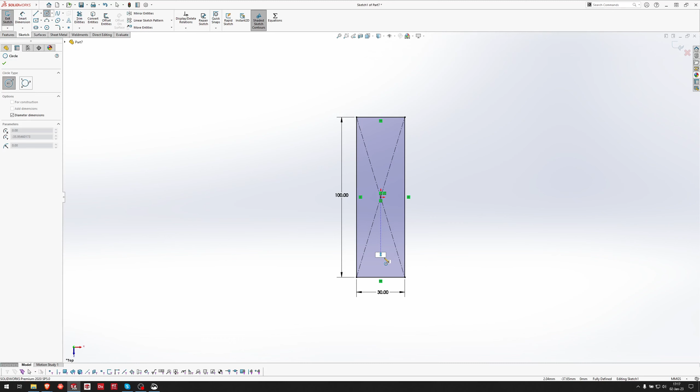We'll go ahead and just do a center rectangle that is 100 by 30. Then we'll add in our circle right away, so this is going to be a 12 millimeter diameter hole that is 16 millimeters. We will make these two vertical to fully define the sketch, then exit out of it.

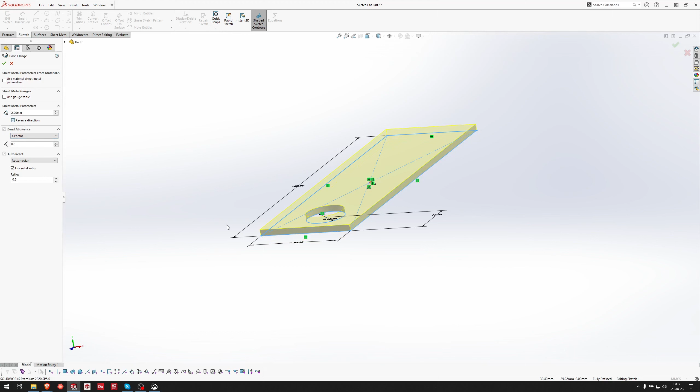From here we set our sheet metal thickness, and in this case I want this to go up, so we'll hit reverse direction, and this is a 2 millimeter thickness, so we're good there. Now one thing we can also do, because we didn't have any bends in this initial sketch, we want to double check our bend radius right here. So we'll edit our sheet metal feature and set our bend radius so we can override default parameters. Everything is there, and we have 2 millimeters and 2 millimeters since our last sheet metal part was just the same.

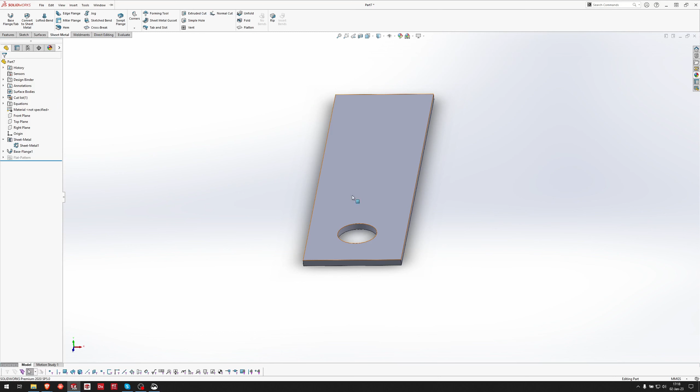So now we'll go ahead and start with our edge flange, which will be here. We'll make sure that the bend starts on that face and then goes out from there rather than being cut in, or the inside face being there. So again, bend outside of that face.

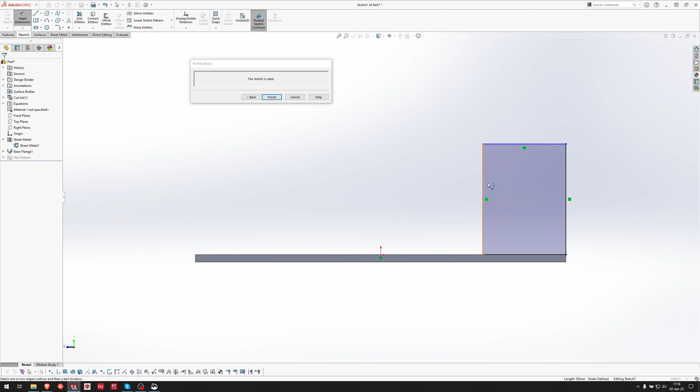And we'll jump into this edit flange profile feature, so I can just drag this line over. Even though it appears fully defined, I can break those relationships really easily. And then I can define this to be 30 millimeters.

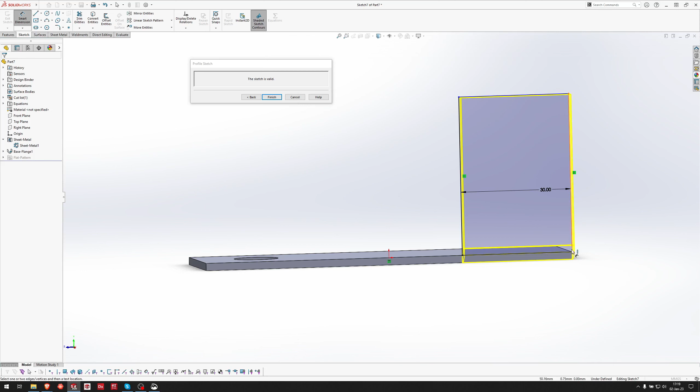Then we also have, and I'm just double checking now, there we go. Okay, so our overall height from the bottom to the top of that edge needs to be 45, and we can delete that relation, and let me just do that to make sure that I'm picking up just the point, not the line. There we go, 45.

And now by deleting that horizontal relationship, I can also add in my 32-degree angle. So just like that, our entire bend is done. We don't have to do separate cut extrudes for everything else, we can just do a single bend.

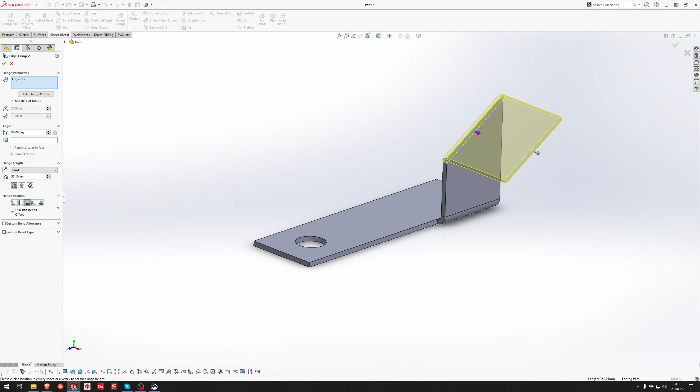And again, another edge flange coming up off of here, outside, because again we're dimensioning to just the start of the bend, so I need to come out. We'll edit the flange profile. We'll smart dimension. You'll see that the origin is placed in kind of a funky spot up here, so it's projected to this edge of this bend.

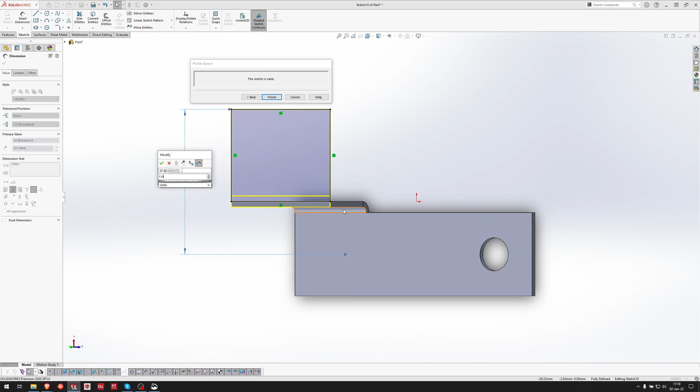So I'm going to dimension to the right plane, so I can actually just click on that in the feature tree and then dimension between those two. This is 110 divided by 2, so that's what I need. And I'll go ahead and add in a slot feature as well.

Perfect, and I'll go ahead and dimension this. This is going to be 12 millimeters wide, 6 millimeters long. I'll go ahead and again pick up, we'll just do this, so 15 is what it's going to end up being. And from the bottom to there is going to be 14.

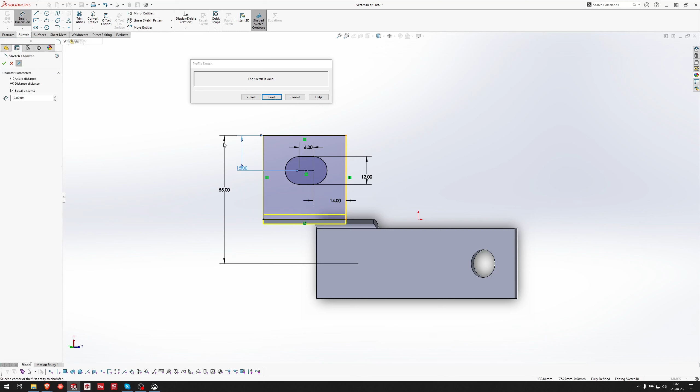Make sure that we picked up the right thing there. 15, that's what we need. And last thing is to go ahead and do a sketch chamfer of 10 millimeters. Go ahead and do there and there. Finish the sketch, and again, just with one sketch, we have our complete profile here.

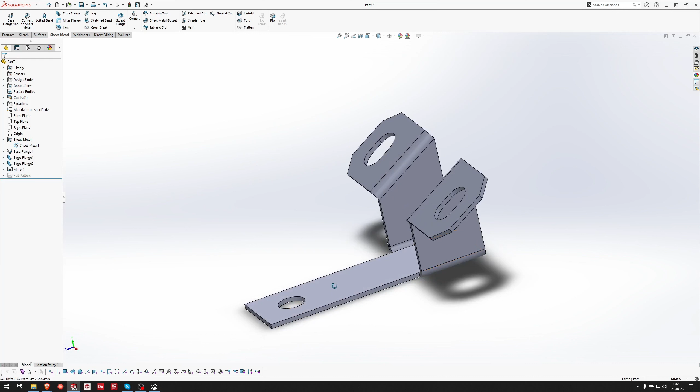We can go ahead and select both of those features and our right plane and jump in and mirror those two features. Hit OK, and we're done with our part. All we have to do now is hit plain carbon steel and verify our mass properties of 114 grams, which is right on the dot.

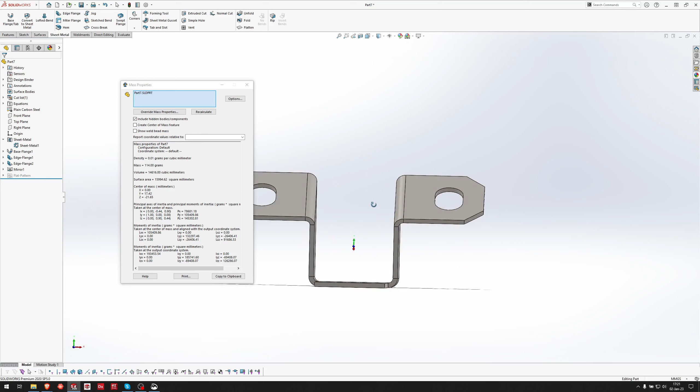So hopefully you learned a few things about sheet metal tools. In this case, it was just that edit flange profile. We can do a lot with the flange profile - we can edit distances, relations, how things are dimensioned, where things are positioned. We can add in our holes right away and chamfers and everything, we don't have to do that at the feature level. So again, just 3 or 4 total features: the base flange, edge flanges, and a mirror feature at the end. Hopefully that helps out, and hopefully you learned something about Solidworks sheet metal.